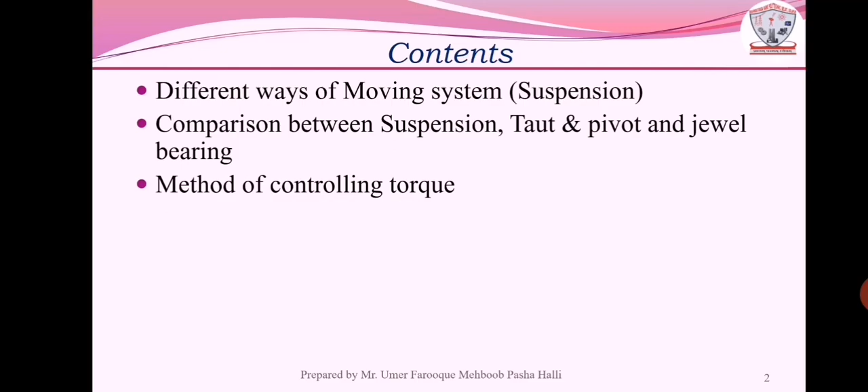Before starting this session, I will introduce the content of today's topic. We are learning about the different ways of moving system. After that, comparison between the suspension, taut suspension and the pivot and jewel bearing. After that, method of controlling torque. After that, comparison between the spring control and gravity control.

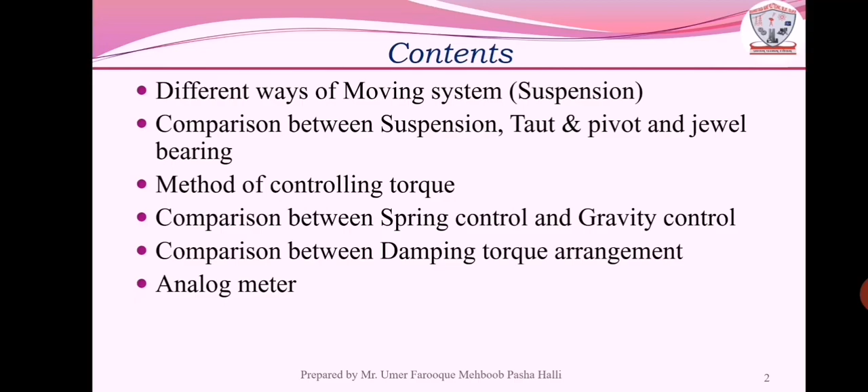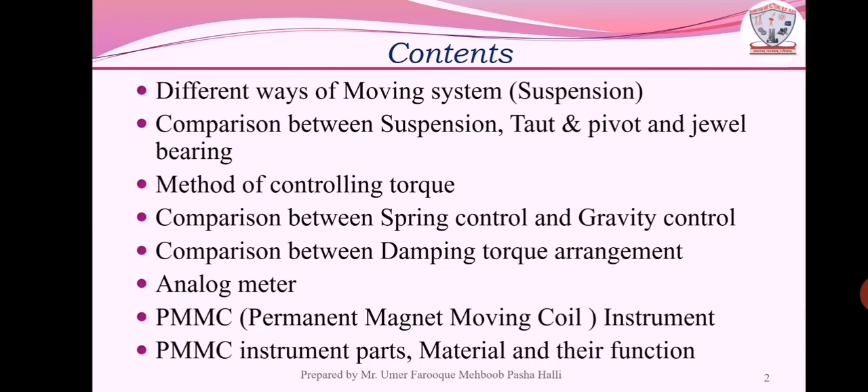After that, the comparison between the damping torque arrangement and analog meter. And finally, PMMC, that is permanent magnet moving coil instrument, and their instrument parts, material and their functions.

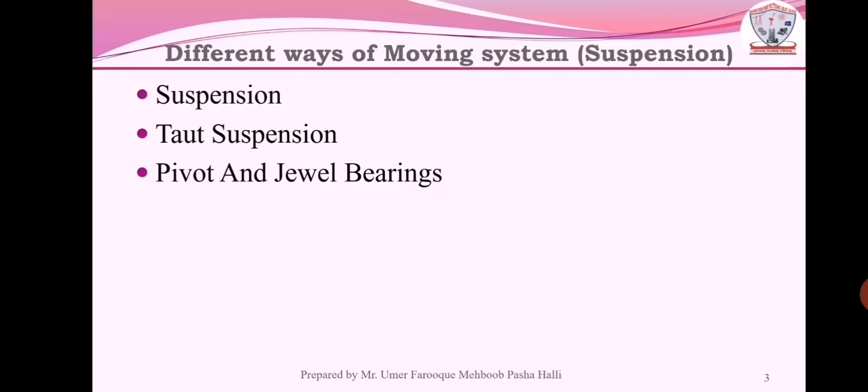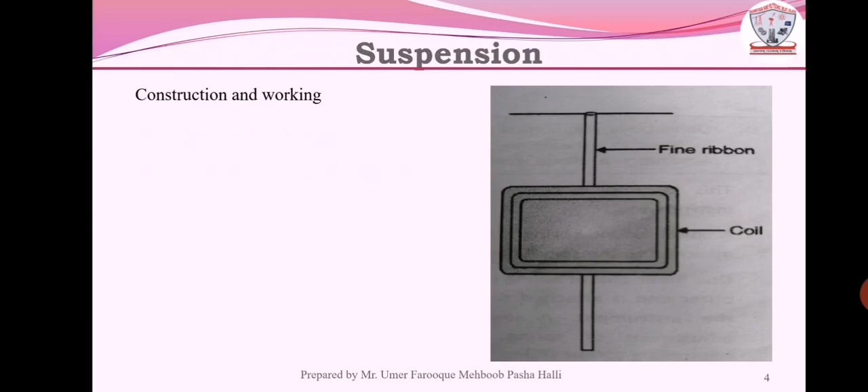So let us start the first point, that is different ways of moving system. It has three sections: first is suspension, second is taut suspension, third one is pivot and jewel bearing. First we discuss the suspension. In suspension, the coil of an instrument is suspended using a fine ribbon made of phosphor bronze. This system is used for highly sensitive instruments, and it can be used only in vertical position. This is called suspension.

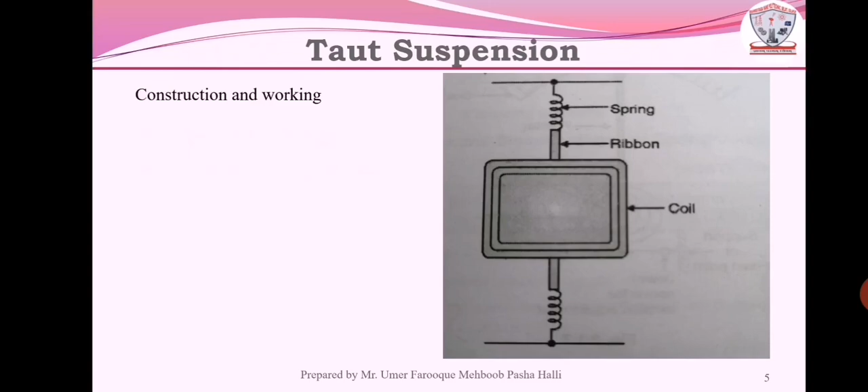Next we are discussing the taut suspension. The figure shows a taut suspension; at the top and bottom it contains the spring, after that a ribbon, and the ribbon is connected to the coil. The taut suspension uses springs to adjust the tension on the ribbon. The coil is supported at the top and bottom as shown in figure. The spring tension can be adjusted.

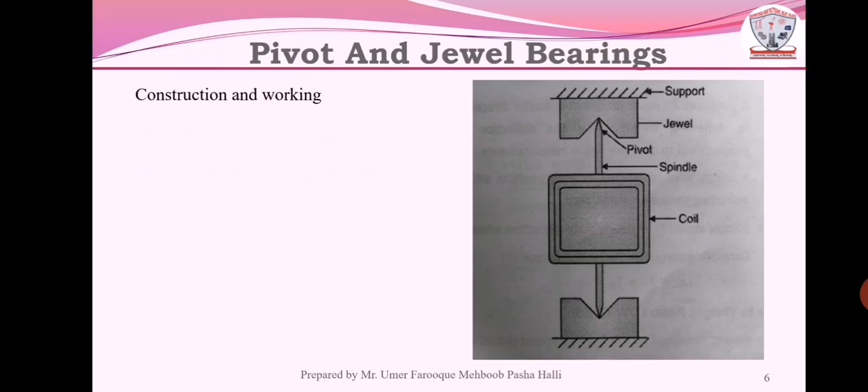Next we are discussing the pivot and jewel bearing. In the pivot and jewel bearing, a spindle carries a coil. The spindle is supported at both ends, top and bottom, by means of the pivot and jewel bearing as shown in figure. The contact area between the pivot and the jewel bearing is kept small to reduce the frictional losses. Therefore, the deflecting torque produces a turning moment of the spindle, due to which the angular deflection takes place. These are the three different moving systems we discussed.

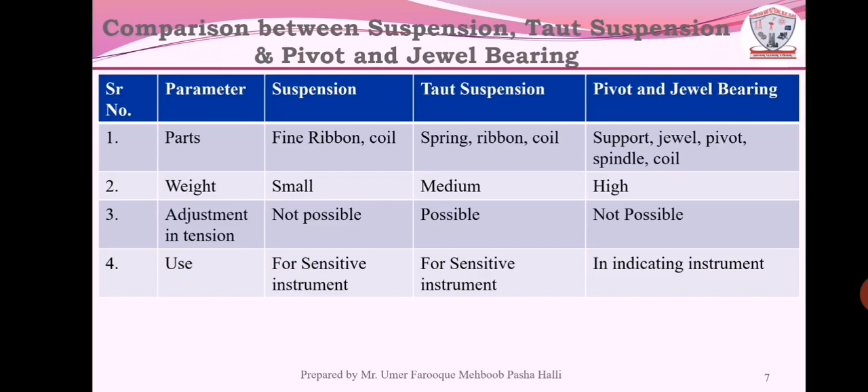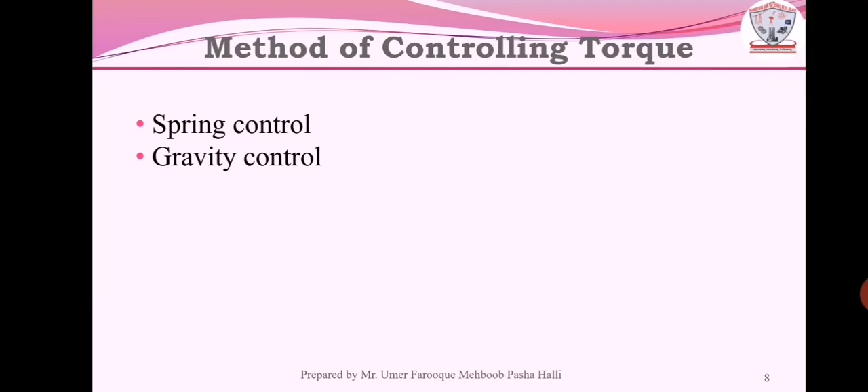Next we are discussing the method of controlling torque. Basically there are two types of control torque, that is spring control and gravity control. The figure shows a spring control method which provides the controlling torque. This method is commonly used for indicating instruments. The spring is spiral wound, made of phosphor bronze, and is attached to the spindle as shown in figure. The inner end of the spring is attached to the spindle and the outer end is attached to a fixed point or support on the instrument.

A jewel screw is provided for the adjustment of spring tension due to misuse by humans. We can easily adjust the pointer at zero point. In many indicating instruments, the spring is a current carrying member. That is, it provides a lead for incoming and outgoing current. The spring also produces controlling torque, and so both electrical and mechanical properties of the spring are important. So this is the working and construction of the spring control.

The basic advantages of spring control are that spring control is easy to apply, the spring material is non-magnetic, cost is less, maintenance is easy, and last one is the adjustment of controlling torque is easy. These are the advantages of the spring control.

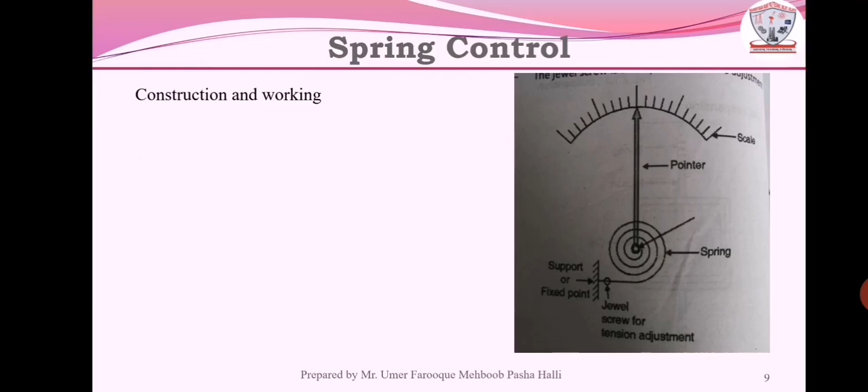Now we are discussing the gravity control. We can see in figure there are two types of weight. One is a balancing weight and second one is a control weight. Both weights are connected perpendicular to each other. It uses gravity force to produce a controlling torque. The control weight and balancing weight are attached to the spindle as shown in figure.

Suppose deflecting torque causes pointer movement in the clockwise direction. The control weight component acts in the opposite direction to the deflecting torque. This component is produced due to gravity effect, hence it is known as gravity control instrument. The balancing weight is provided for the mechanical balance for zero setting. The control and balancing weights are adjustable. They can be moved towards the spindle or away from the spindle.

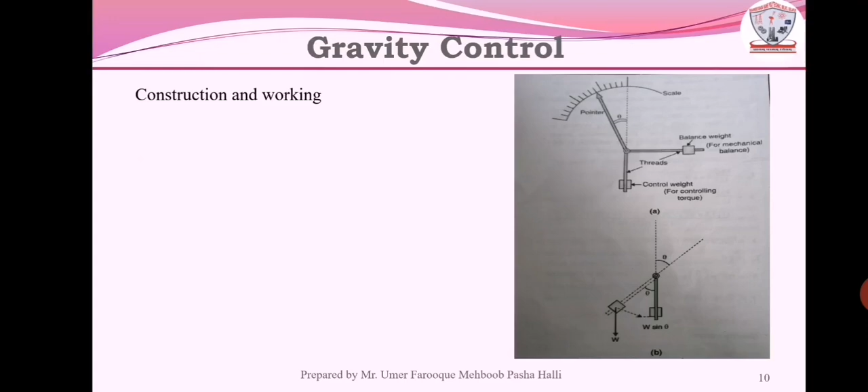This is the method of gravity control. What are the advantages? There is no effect of temperature, longer life, adjustment can be done easily, and it is an effective method of controlling torque. This is the method of gravity control.

Now we are discussing the comparison between spring control and gravity control. The first parameter is the scale. The spring scale is uniform, gravity is not uniform. Cost is cheap for spring, gravity is obviously high, costly. Weight is less for spring, gravity is more, obviously due to the balance weight and control weight. Next, space required is less in spring control and more for gravity control.

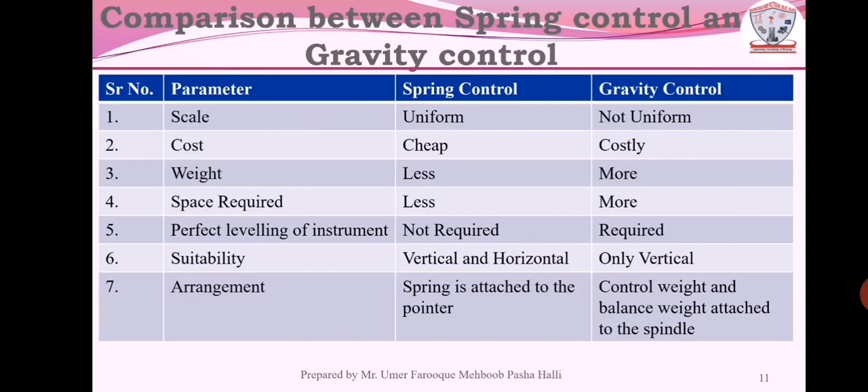Perfect leveling of the instrument. Spring does not require any leveling, but gravity control requires leveling. Suitability: spring control can be used in vertical or horizontal position, but gravity is only used in vertical. Arrangement: the spring is attached to the pointer, but the control weight and the balance weight are attached to the spindle. This is a comparison of both control methods.

Now we are discussing the comparison between damping torque arrangements. There are three main damping types: one is air friction, second is fluid friction, and third is eddy current damping. The name indicates air, which means pressure difference. Second is fluid, so there will be oil, and eddy current is due to the current.

First parameter is the principle. The principle of air friction damping is the air pressure difference. Second one is the oil. Third one is Lenz's law. Second, the arrangement parameter: there will be the piston rod and air cylinder; fluid, oil container and vanes; eddy current, permanent magnet and aluminum former. There is a basic diagram of the air friction, oil and eddy current.

The response for the damping is moderate, slow and quick. Next is suitability: vertical and horizontal for air friction, only vertical for oil, and the third one can be used in vertical as well as horizontal instruments. The cost is moderate in air friction damping. Second is more high because oil is required.

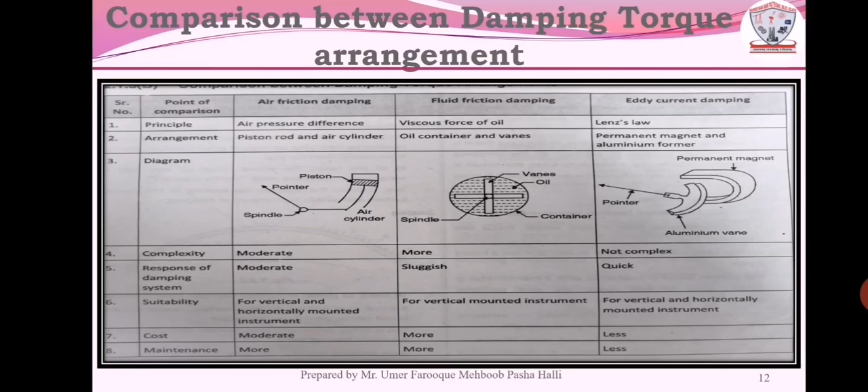Last one is maintenance. Air friction and fluid friction require more maintenance compared to eddy current. Eddy current requires less maintenance. So this is the comparison between the damping torque arrangements.

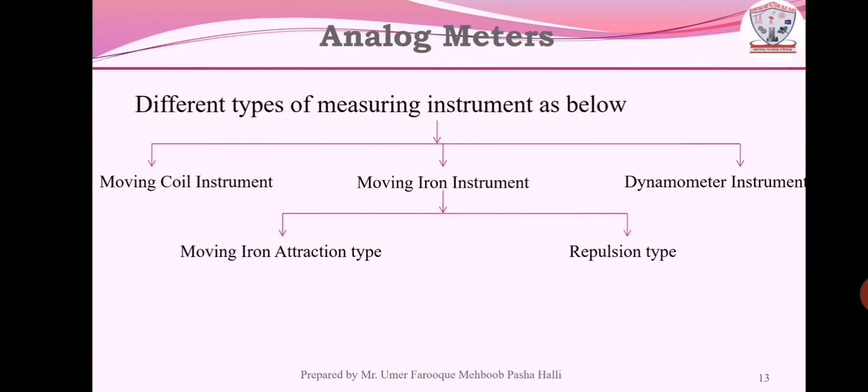Now we are discussing the analog meter. Basically there are different types of measuring instruments. First is the moving coil instrument, second is the moving iron instrument, third is the dynamometer instrument. The moving iron instrument is further divided into two categories: attraction type and repulsion type. We discuss them one by one in the next PPT, starting with permanent magnet moving coil, that is PMMC. For the PMMC instrument we discuss working principle and construction.

A coil is wound on an aluminum former which is supported by the spindle. The two ends of the spindle are supported by jewel bearings. The iron cylinder is placed inside the coil and this assembly is surrounded by the permanent magnet. The coil carries the current to be measured. The current is fed into and taken from the coil through springs. The deflecting torque is produced as described in the working principle. Controlling torque is achieved with the spring and damping torque is provided with the help of the aluminum former. This is the construction of our PMMC.

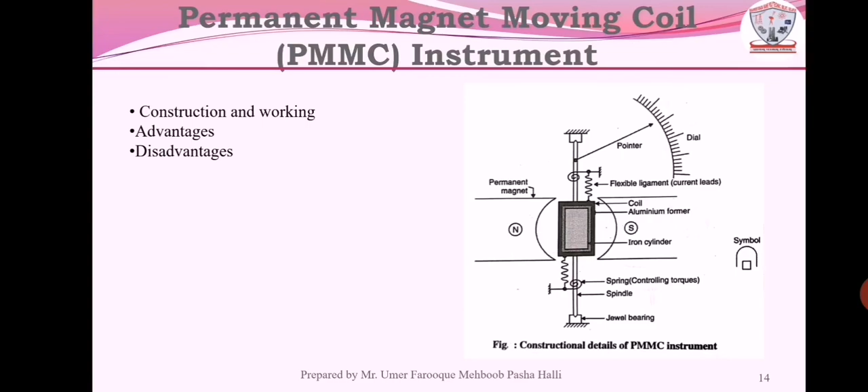Now we are discussing the permanent magnet moving coil instrument parts, materials and their functions. The permanent magnet material is ferromagnetic and its function is to produce the magnetic flux. Iron cylinder is magnetic material, used to strengthen magnetic flux linkage. Coil, copper, to carry the current and produce the deflection. Former, aluminum, to support the coil and produce the damping torque.

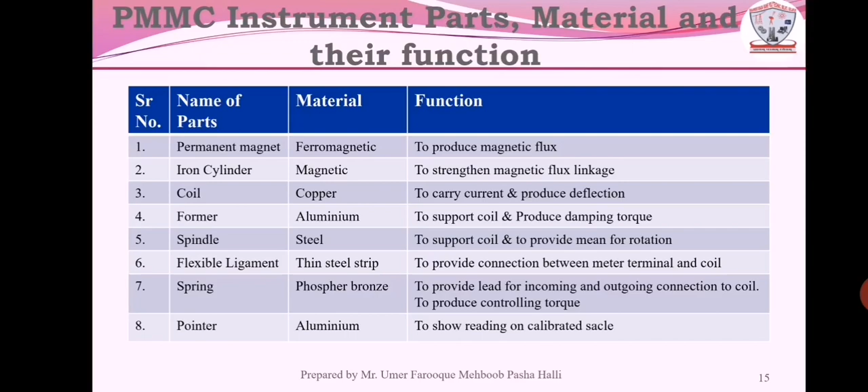Spindle, steel, to support the coil and provide a means for rotation. Flexible ligament, thin steel strip, to provide a connection between the meter terminal and coil. Next is the spring, phosphor bronze, to provide a lead for incoming and outgoing connection to the coil and produce controlling torque. Last one is the pointer, made of aluminum, to show the reading on the calibrated scale.